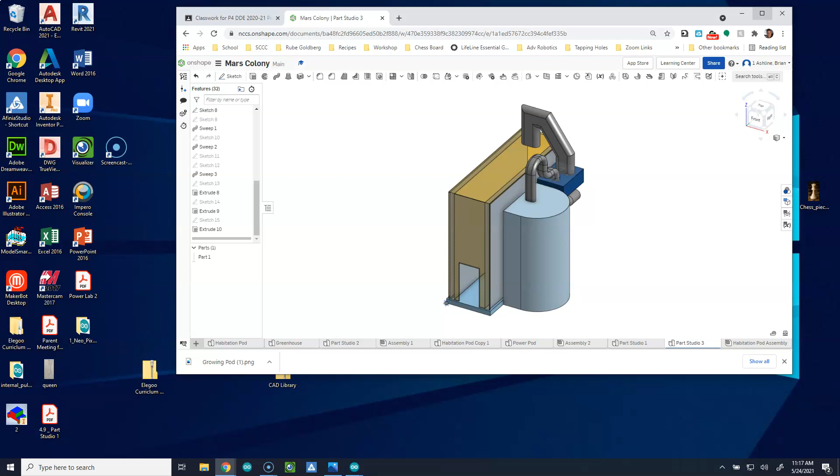Everybody, I want to talk to you guys about getting ready to turn in your different objects.

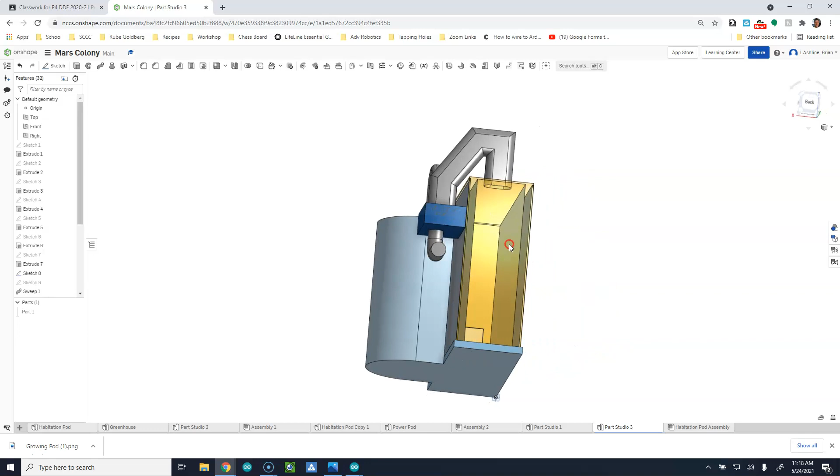Okay, so at this point, I have my greenhouse complete, my habitation pod complete, my power pod complete, and my oxygen producing system complete. So I'm ready to start producing images for each one of these and turn them in.

One of the first things you need to do is make sure your labels are correct, so that when you export these, they come out with a label. So we're going to right click down here and say rename. This is my oxygen plant - make oxygen using electrolysis.

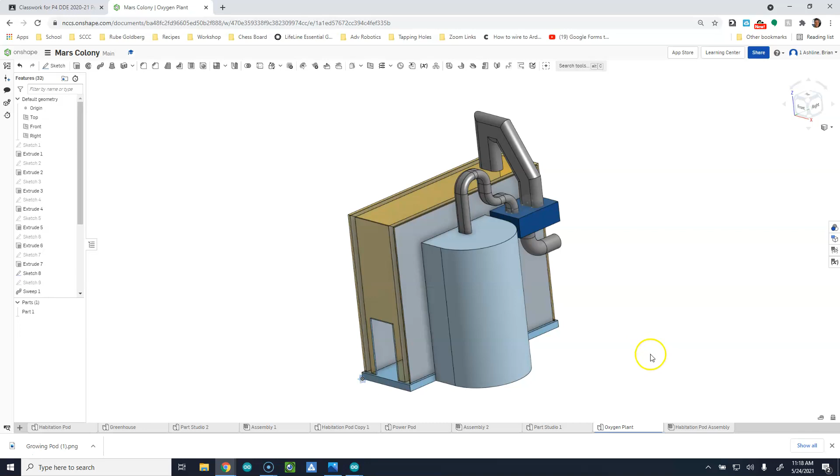Then I have my power pod that's already labeled. I have my habitation pod, which might be right here. And then I have my greenhouse. So all of those are labeled.

They're ready to go. The next thing I need to check is, do I have color on these things? Do I have enough detail on these things? And are all of my sketches and planes and everything else turned off? So here we can see that I still have some planes on.

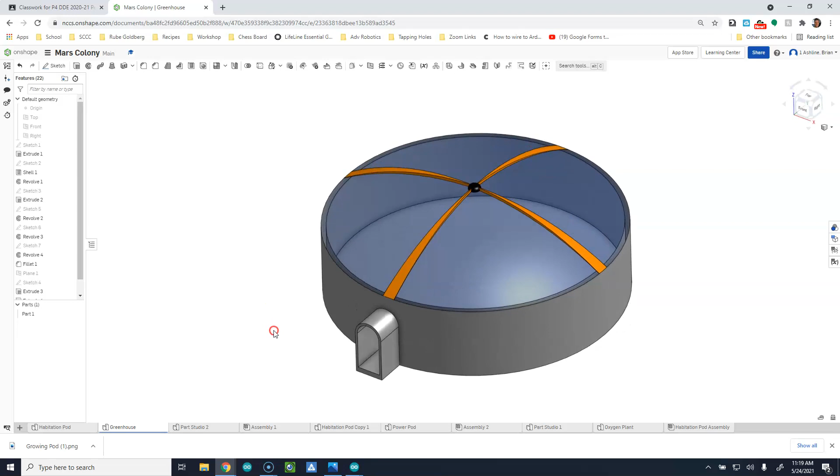I still have my origin on, so I can turn all that off. I do have different colors, details. The thing I really don't want to see, honestly, is that default blue color on every single part. We should definitely be changing the colors of things and adding details throughout.

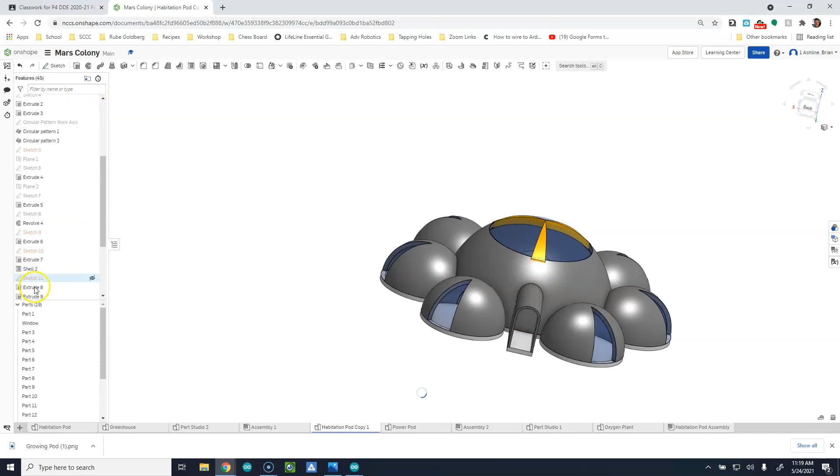So just take a look at your different pieces. Again, make sure your origin and planes are off, and make sure all your sketches are turned off as you go through. Here, for instance, we can see I have this sketch coming up above my origin. We can also still see all my planes, so I'm going to turn all of that off.

We can see sketch 5 is this sketch right here, that's that middle plane, so I'm going to turn that sketch off, and now that's ready to be turned in.

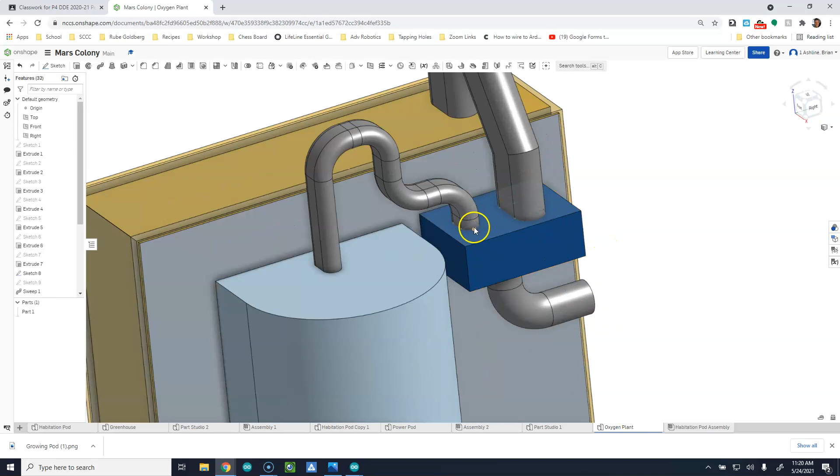Then my oxygen plant, for some of my sweeps, I have some sketches still turned on here, so I need to go down through. You'll notice that most of my sketches are gray on the sidebar, but sketch 8 is not, and when I hover over it, you can see that that's there. So I'm going to turn the visibility off on that.

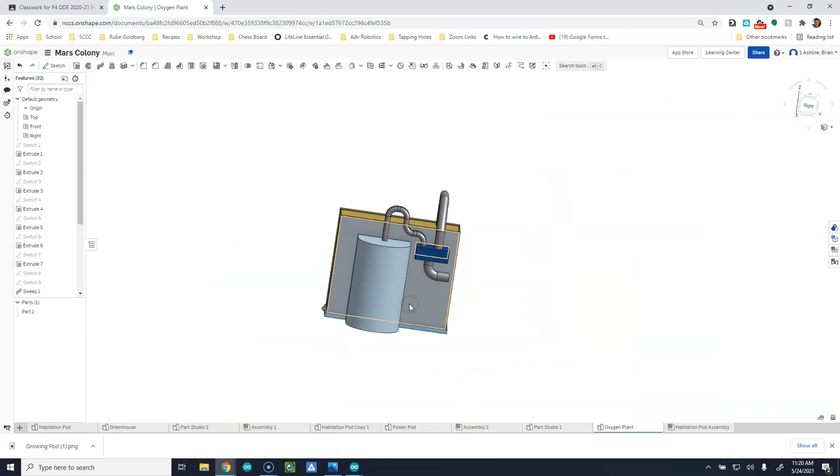I think that I'm pretty well set up at this point. So, time to export - again, find your most detailed view. I think in this particular one, maybe it is kind of hard to tell, I've got lots of stuff going on and lots of views. Let's say this one here, though. I can't see my access hatch, but I can see a lot of the other stuff.

So I'm going to come up. I'm going to say print. I'm going to make sure it fits in the box. I'm going to say download image.

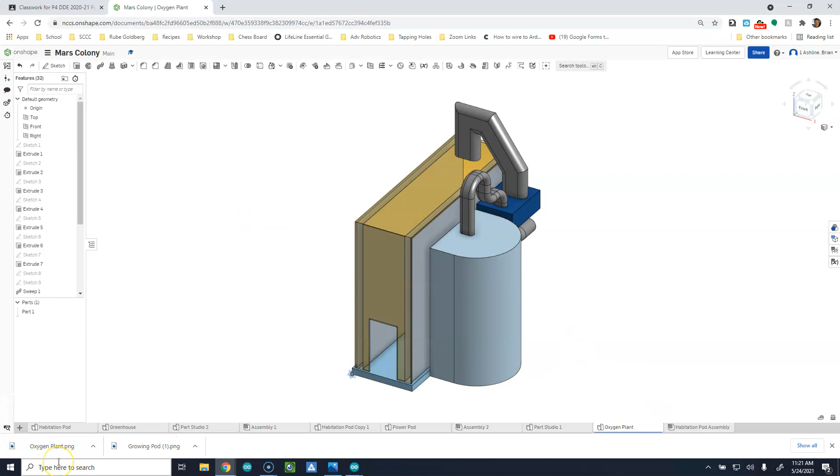Now notice, because I've named this oxygen plant, this is called oxygen plant. If you didn't have this thing named, then you could say show in folder, and then we could right click over here and say rename, and you could name this thing oxygen plant or whatever it's going to be. Okay, please name your different pieces so I know what it is when I look at them.

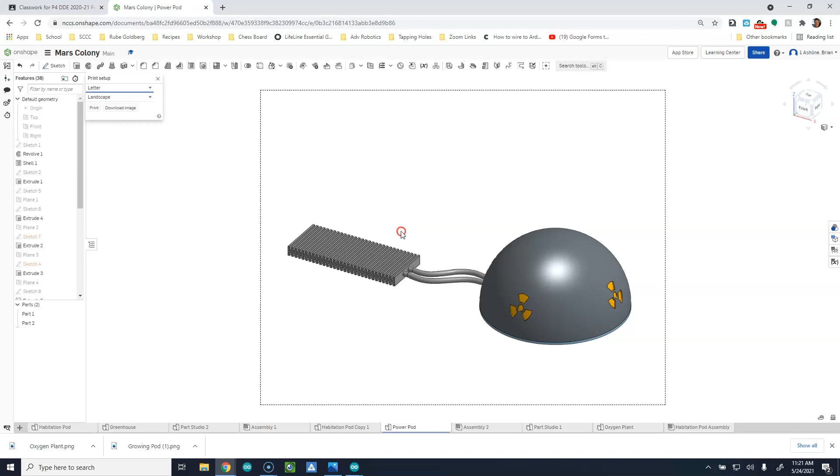Power Pod, I'm going to go through the same process - I'm going to print, I'm going to fit, I'm going to download my image. For my greenhouse, again, same thing - print, get my image fit, download that.

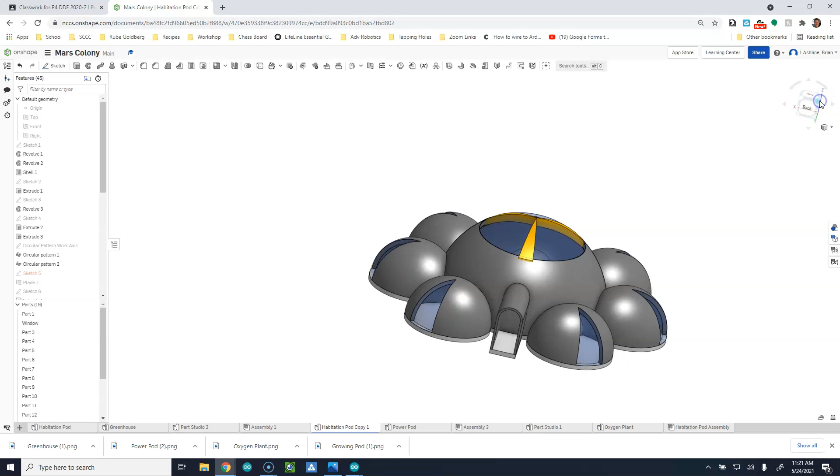Lastly, not that habitation pod, but this habitation pod - go to, again, we want to find the area with the most detail, and we're going to come down and say print, fit it, download that image too. So now we can see that I have my habitation pod, my greenhouse, my power pod, and my oxygen plant, all of them named.

So I can now just go into Classroom and attach these to the assignments to be turned in later on. Okay? If you have any questions on this, feel free to reach out to me.

Again, I am expecting different colors. I'm expecting a lot of detail. I'm expecting something to come to me with some thought gone into it. All right, so if you have questions about that, let me know.